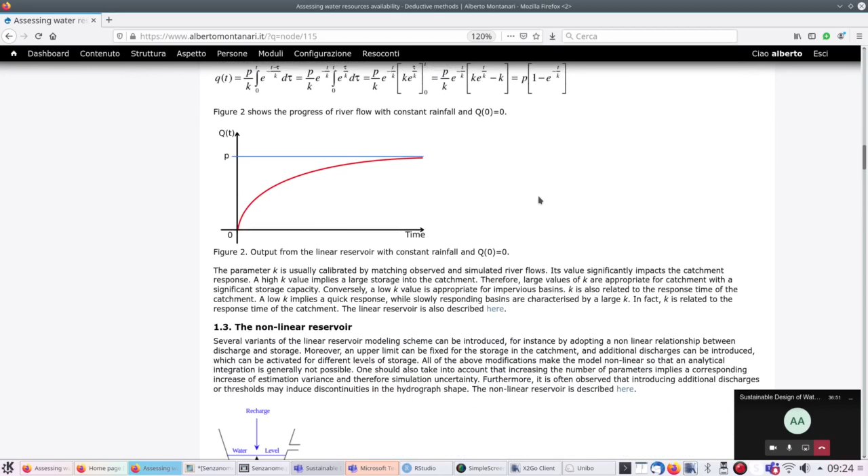Okay, so let's go to Hymod. First of all, let me point out some changes that I did to the web page. I think you already had a look at it.

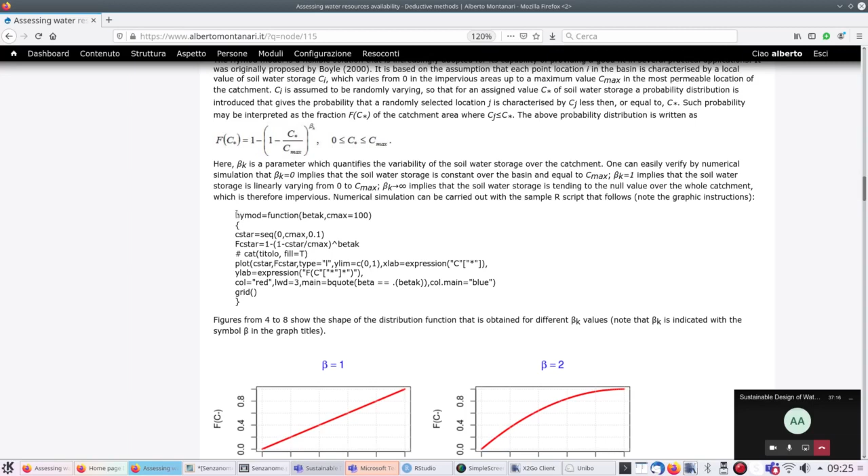Perhaps the most important is the fact that I included these graphs, and I'll comment on them later, but I just want to point out the R code, which I embedded here and I'm highlighting with the mouse.

I think it is interesting for the graphic parameters. The code is very simple, just a code to draw a graph, but what I did here in these figures is use subscripts. In C star is a subscript. Look at how the subscript was introduced, the instruction is here. I'm not commenting now, just have a look at it.

Also, another interesting thing is the graphic title, because here I put first a Greek letter, which is not that easy. Second, the value of the parameter was not manually introduced. So beta equal 1 in the first graph, 1 was not manually introduced. 1 is a variable in R, which is called beta k in this code. So it is not really easy to find out on the web how to write this instruction which I'm selecting.

Main is the argument of the plot function that allows you to specify the plot title. Usually what people do is write main equal, between commas, some text. Here the instruction is different because I had to use bquote, the R function that allows you to combine values of variables with text. Again, we are not discussing it in detail now.

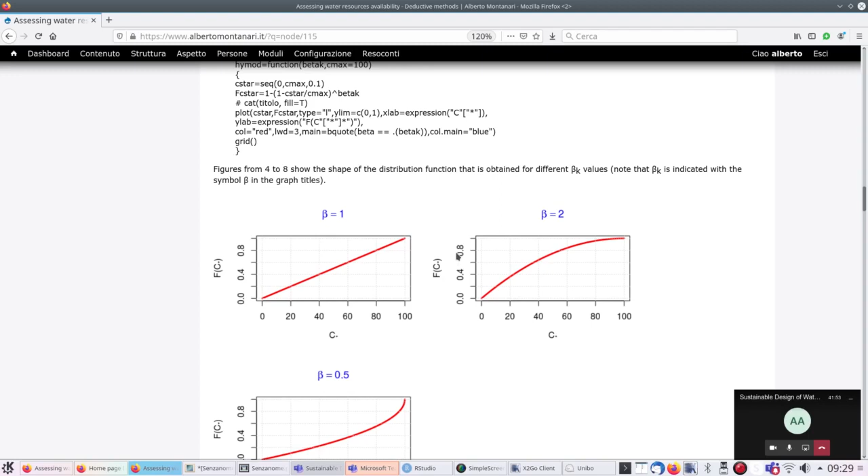Now, I want to make sure, also because I was not completely happy with my lecturing last time in terms of clarity, that you got the concept of this model. And again, I go up and let's see this relationship.

The model has a basic relationship, that's a probability distribution. We learned what probability is, and it gives a probability depending on essentially two parameters, Cmax and beta k. Cmax and beta k in this function are two parameters, namely two values that I can specify to give the function a given shape. Of course, the shape of this function will be determined based on the catchment of my application. Just keep in mind two parameters, it's a probability distribution with two parameters.

And it gives the probability that for a given point in the catchment, we have a soil water storage C star, which is lower or equal than a given value. It gives you the probability that we have a soil water storage in the catchment at a given location that is lower or equal than a given value C star.

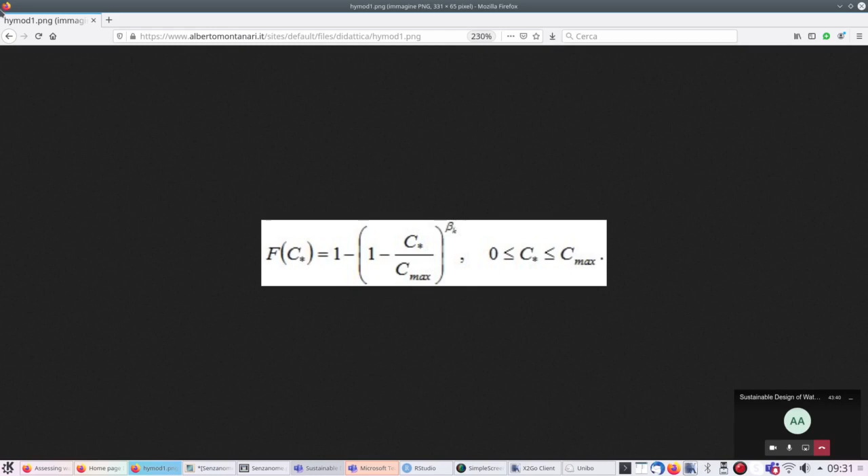So again, I fix a value C star of soil water storage, and the function gives the probability that in any location I have less or equal such water storage. Okay, and let's now just focus a little bit more on what is the meaning of beta tending to 0. First of all, beta equal 1 means that you have a linear relationship between C star and the probability F C star.

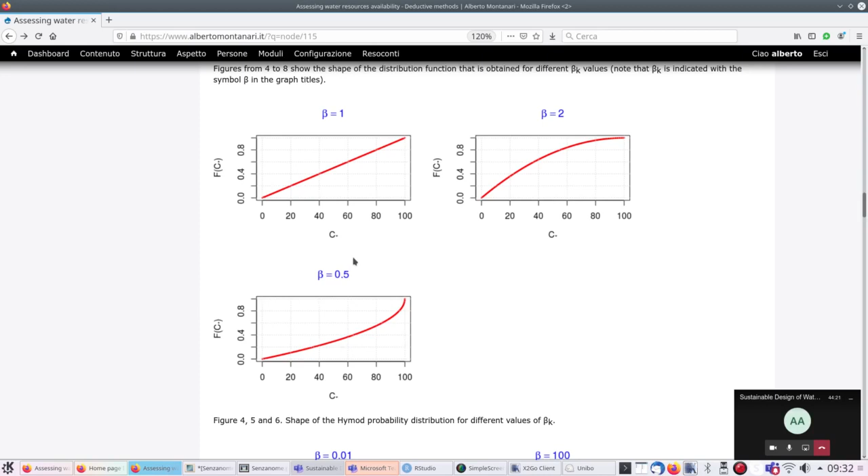Perfect. Beta greater than 1 means that the function is concave, so the convexity is towards the bottom of the figure. Beta less than 1, the function is convex, meaning that the convexity is upward towards the upper part of the figure. Now, I want to stress this, what happens if beta is tending to 0? So it means that, for instance, if you take a C star, which is 99 in this case, you have a probability of 0 that in the catchment you have less storage than that, which means that everywhere in the catchment you have a very high storage, which is Cmax.

Okay. Conversely, if beta increases, beta equal 100, means that even for a very small storage, you have a very high probability that everywhere in the catchment you have less storage than that. So even if I get a storage of 2, I have a high probability that everywhere in the catchment, the water storage capacity is lower than 2, which means that the catchment is impervious.

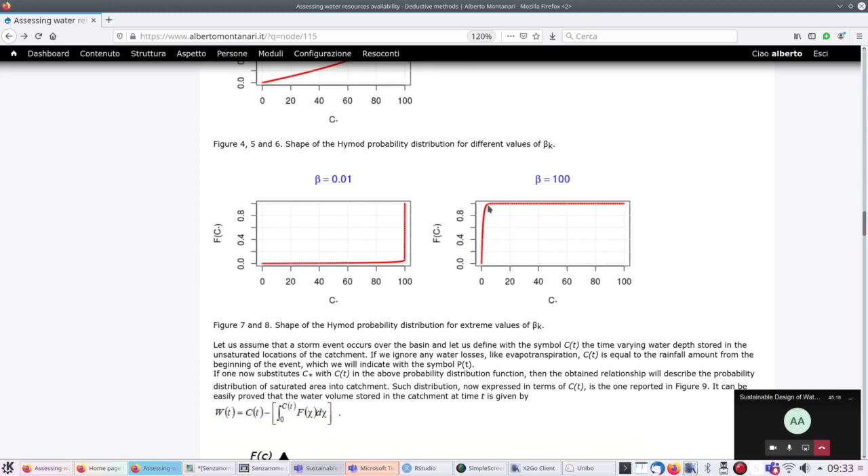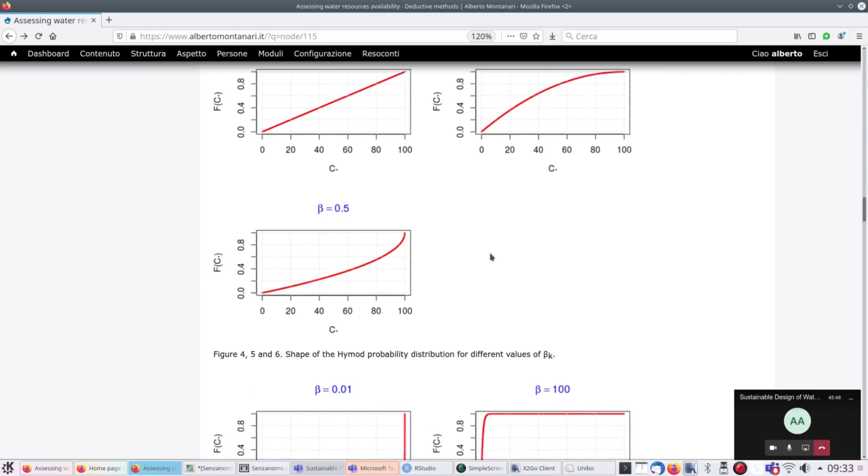Okay? So it's clear that if I look at a generic shape of this function, the shape will change depending on the catchment. If the catchment is very permeable everywhere, I expect a convexity which is directed upward, beta less than 1. If the catchment is more or less impervious, I expect a convexity that is directed downward, beta greater than 1. Perfect.

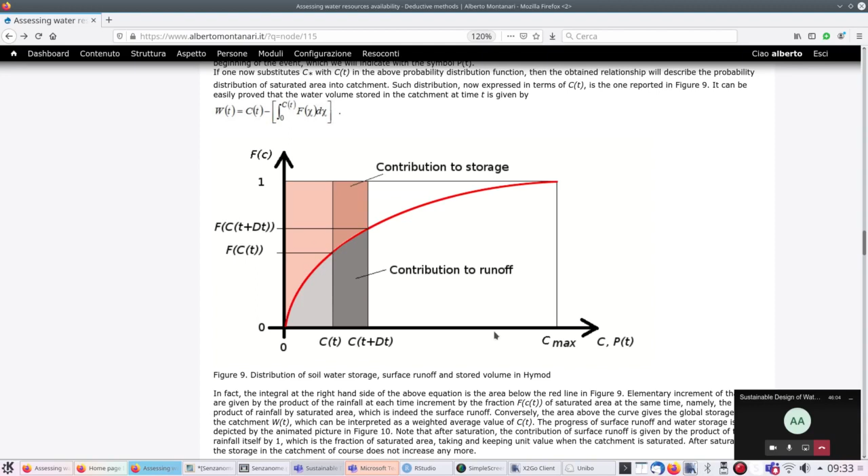And the other thing, which I hope you understood, is this figure. As time passes during a rainfall event, you get at each time step a rainfall P. So let's suppose you have an event of 10 hours. Each hour you have PT, which is rainfall at each hour. The cumulative rainfall, under the assumption that we don't have any losses, is equal to CT. And remember that CT is the water storage in the parts of the catchment that are not saturated, which is equal to rainfall, because if it rains over a very permeable catchment, all the rainfall infiltrates, so all the rainfall is equal to storage.

And then this dark gray shaded area under the curve is the individual contribution to runoff, because the difference CT plus DT minus CT is rainfall at each time step. And if you multiply rainfall times the difference F(CT plus DT) minus F(CT), or let me say, if you multiply rainfall times F(C), whatever it is, you get rainfall multiplied by the fraction of areas that have a storage that is less than the considered storage at time t, which means runoff, because what rains over the areas that have less storage than rainfall is completely transformed into runoff, because it is rain that falls over an already saturated catchment. Because if the storage is less than rainfall, it means that the catchment is saturated.

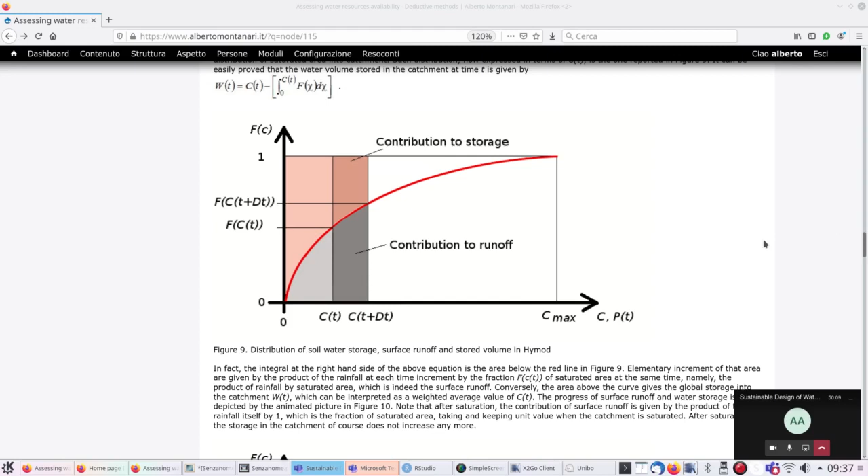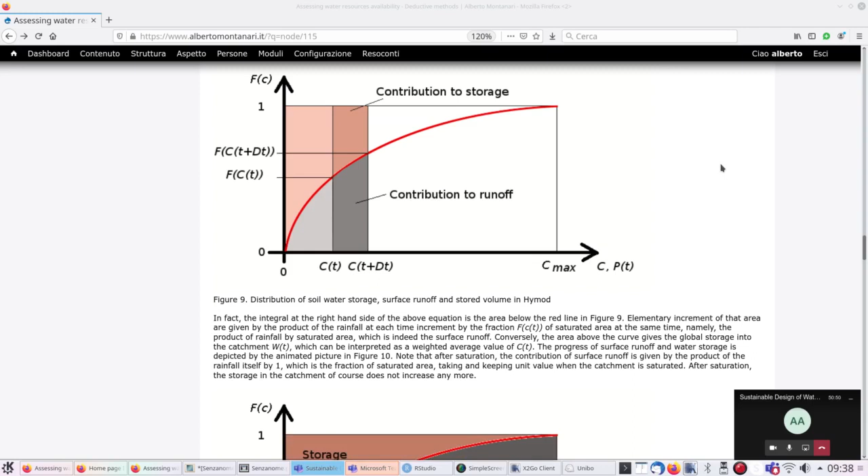Before we move forward, let's note that we are assuming, you can't see it here but on my website I updated because this specification was missing, it was implicit. We are assuming that C0 is equal to 0, which means that at the beginning of the event we have 0 rainfall, 0 cumulative rainfall. This is fine, but we also have 0 storage in the catchment, because we are making the assumption that the cumulative rainfall is equal to storage in the catchment in the unsaturated areas, and therefore let's assume that it's 0.

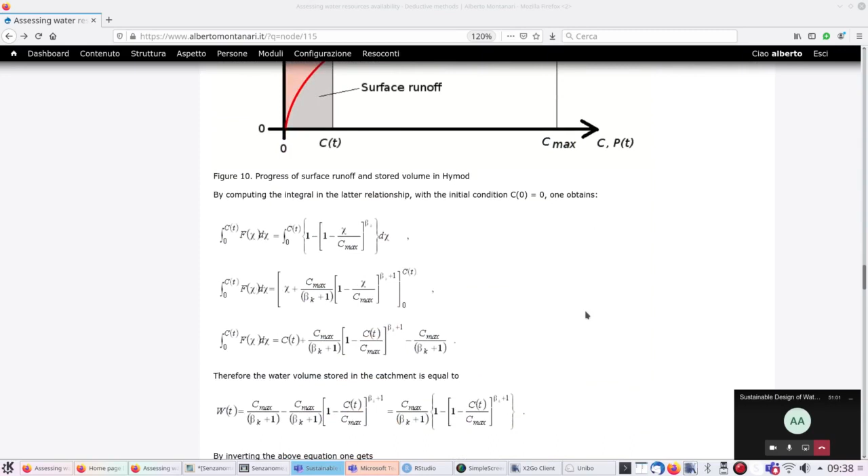Very good. Now we have to compute this integral, and I would like to make an experiment now, because here you can see the computation of the integral. On the other hand, there are some missing steps here. I would like to make an experiment and try to write on a sheet. I'm missing the blackboard because at this stage I would have written on the blackboard in a classroom.

And by the way, I bought, but I'm still waiting for it to be sent to my home, a graphic tablet which will allow me to emulate the blackboard, but still I don't have it. So let me try to use the phone to share my blank sheet with you. I'm not sure I can succeed.

Let's see. I think I now have to look at the screen of the PC. I'm not sure I can. Let me see, still not appearing, just 1 second. Okay, now it should work. Just 1 second, let's see if the connection is good enough, because I still can't see it on my screen. Doesn't appear, just 1 second, I try again. Should be okay, let's see if it works. Still, okay, maybe I have to, 1 second. Okay. Let me try again, it worked yesterday, but you know, always tricky. Still can't see here, so let me see. Okay, I think I got it, 1 second. So let's see. No, still not working. Don't understand why. Okay, so I think I'll need to. You can't see a blank sheet, isn't it? I think you just see a kind of pink circle in between. Let me see if I can. Okay, let's forget about it.

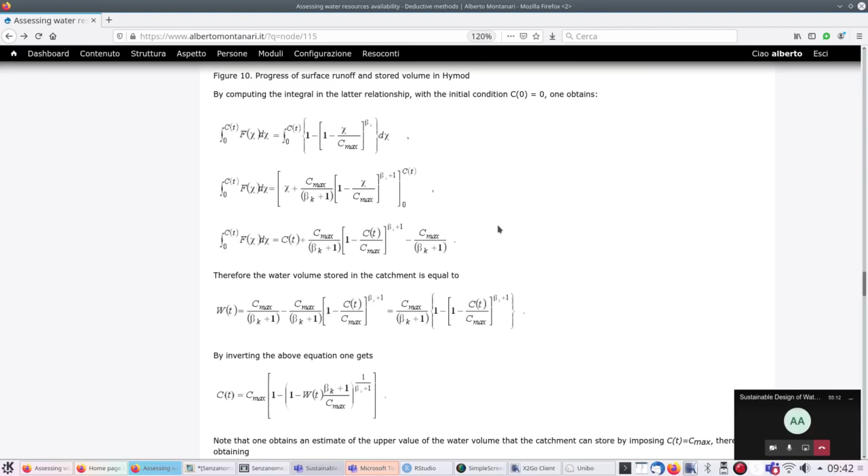Okay, so what you see in the first row is just the previous relationship with an integral sign on the left and right-hand side, and the integral is computed between 0 and a given value of Ct. Again, remember that Ct is our rainfall from the beginning of the event.

Good. Now, be also careful, I am including a variable of integration, which I indicate with the symbol chi. The variable of integration is just to distinguish inside the integral the varying variable, varying between 0 and Ct, which is the independent variable of my function f.

Okay. Now, in the right-hand side, as I said, you just see under the sign of integral the difference 1 minus square parenthesis 1 minus chi divided by Cmax to the power of beta k. Chi substitutes the previous Ct variable, which is now the variable of integration.

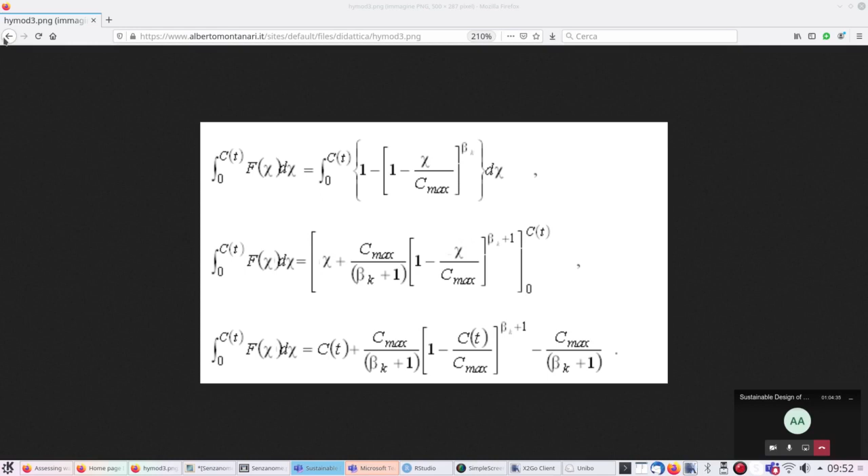Okay, good. Now let me go back to the website. So, if we accept that this quantity, meaning the quantity you now see in the upper part of the screen, is the cumulative runoff from the beginning of the event, then if we want to compute the water volume stored in the catchment, this is simply equal to Ct minus the cumulative runoff, because Ct is total rainfall. If you subtract from total rainfall the cumulative runoff, you get the storage.

So if you get the quantity which is in the upper part of my screen, and compute the difference Ct minus that quantity, you precisely get the storage. And in fact, if you look at the quantity in the upper part of my screen, it is Ct plus something. If you compute Ct minus Ct, they annihilate each other, and therefore you just remain with the plus something, which is precisely what you find below, with the sign changed because I computed a difference. I computed Ct minus the quantity in the upper part of the screen, and therefore below I find Cmax divided by beta k plus 1.

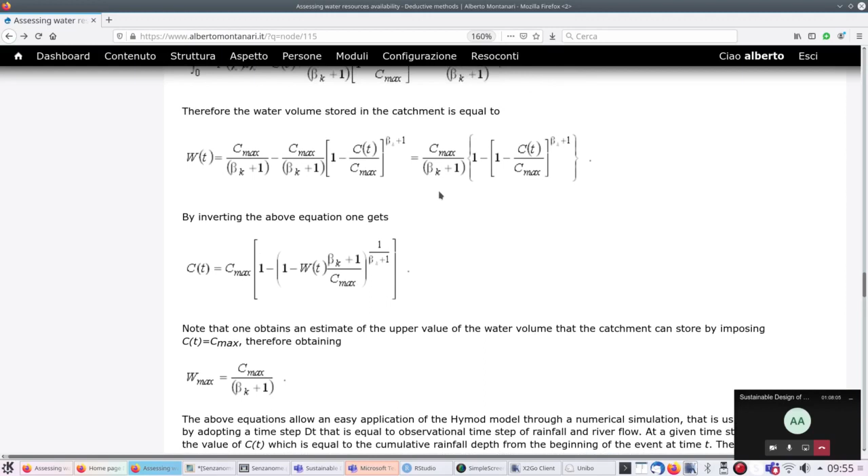So let's invert the quantity that you see in the upper part of the screen, in order to get an explicit representation for Ct, which you find in the second row. This will be useful later. Passing from the first row to the second row is just a simple mathematical transformation. You have to extract Ct from the first row. In order to do that, you need to raise the whole relationship to a power, and the power is 1 divided by beta k plus 1. Then with a simple mathematical transformation, you get the explicit value for Ct.

Good. Now, it is interesting to note what you see here and this equation. What is this equation? It's the max storage. And when do you obtain the max storage? When Ct is equal to Cmax.

Ct is cumulative rainfall. When you get cumulative rainfall which equates the max storage into the catchment, where when I say max storage, I mean the maximum value of storage at each individual location. So I get the storage at each individual location and I get the max. So when rainfall equates the max storage over the catchment, meaning max individual storage at each location, the catchment is saturated, which means that even the single location that has the highest capability to store water is saturated, because rainfall equates the highest capability in the catchment to store water. So the catchment is saturated.

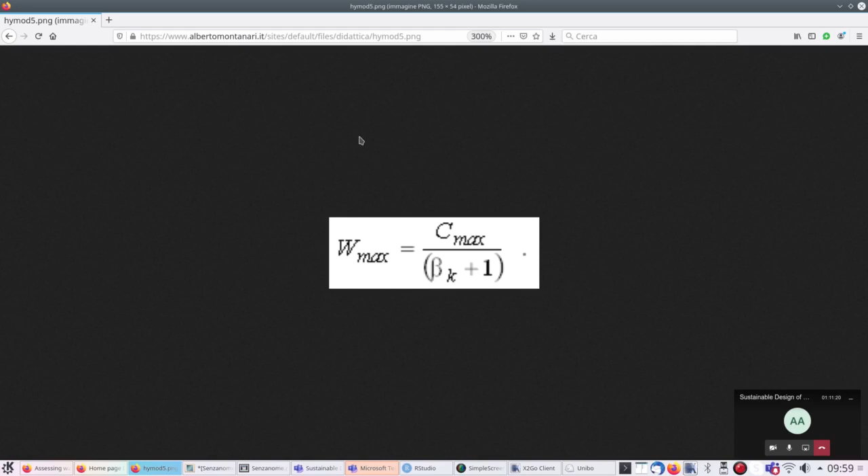The same thing occurs over a saturated catchment. It's interesting then to compute what is the overall cumulative storage over the catchment when it gets to saturation. This is easy to compute, it's given by this relationship. How is this relationship derived? Simply by going back to the relationship you see in the upper part of the screen, on the right, and putting Cmax instead of Ct. And therefore, between square parentheses, you get 1 minus 1, which is 0. So between curly brackets you get just 1, and therefore your Wmax is just equal to the multiplier Cmax divided by beta k plus 1.

Any question? Because these are all the equations that we need to apply the model. Believe me, it is complicated to explain in words, but it's not complicated to understand. It's just an integral. And you will see it even less complicated to apply in R. It's very simple.

No questions? So, but I give you 30 seconds more while I put on the screen what I need. Just one second because I had to decline a phone call. Okay, very good. Give me one minute because I can't see the chat anymore. I have to understand what happened. Okay, I see it, very good. And let me move this here.

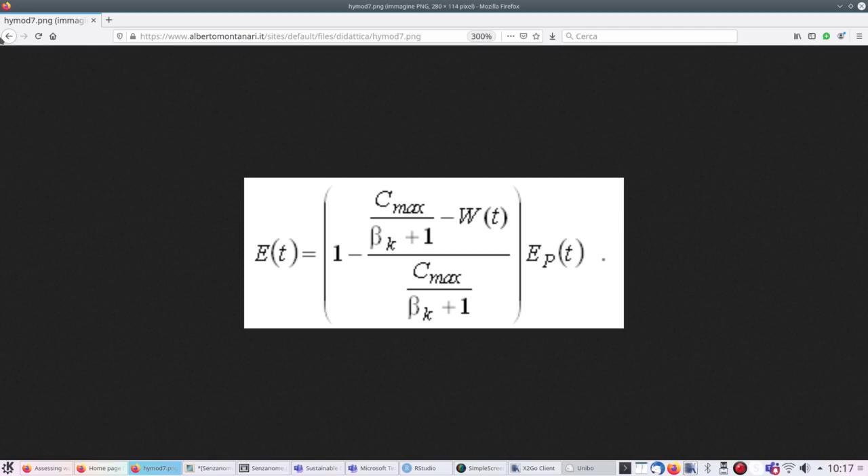Now we only have the problem that we have to subtract it from something. This is a water loss. Evapotranspiration is a water loss, so we need to subtract it from something. What is the something? It's the catchment storage, the ideal state variable from which we have to subtract evapotranspiration.

And in fact, you see here, let me see where it's written, okay, we need the relationship, let's give it time to get selected. The water storage at time t plus 1 is given by W(t+1) equals Wt minus

Et. It is simply subtracted. And note that we subtract the evapotranspiration from water storage at the end of the time step. It's just a matter of choice.

So we first compute ER1 and ER2, and then before passing to the next step, we subtract evapotranspiration from the resulting storage. As I said, it's just a matter of choice. You may subtract evapotranspiration at the beginning of the time step, it's just your choice, and it's part of the numerical integration approximation, as we discussed last time.

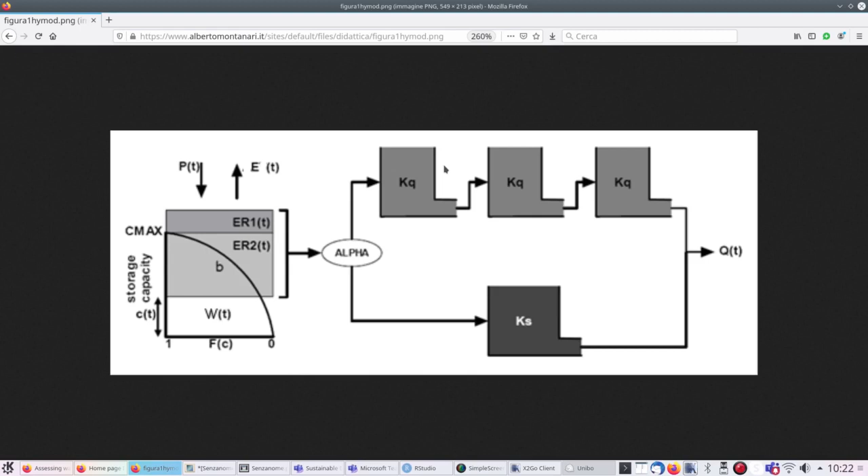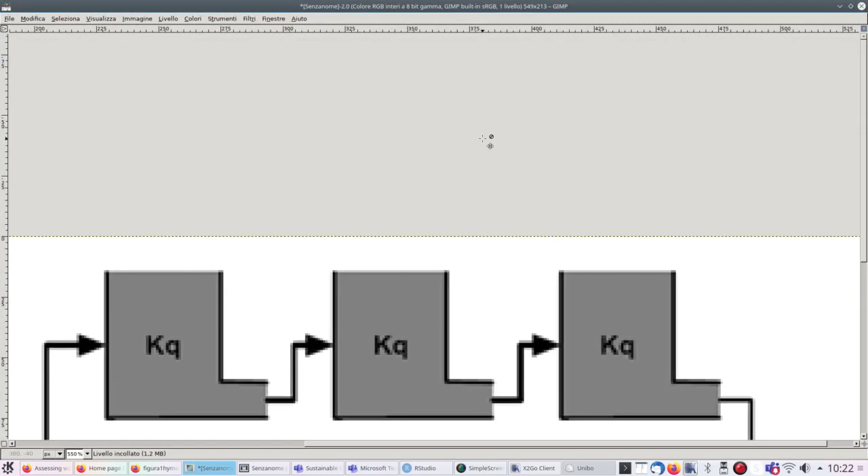But I just want to tell you that the thick black lines you see at the bottom of the left figure, this kind of quarter of circle, let me do this, so we breathe a little bit. Let me open it in GIMP. Okay, just a second. Good, here we are. Too big. Let's see, I think this is the correct size. Okay, just one second. Let's do like this, I need the panels. Just one second, okay, this is what I need, but I need to change the color, I don't like black. Okay, now it works, but second dimension, let's put, okay, good.

As I said, this quarter of circle here, and now I'm trying to follow this curve. Okay, this is just the probability distribution that you were used to see with another orientation. If you look at the vertical axis, it's now representing CT, and it was the horizontal axis before. If you look at the horizontal axis, it's representing FC, but with an inverse representation between 0 and 1. And it is the same representation.

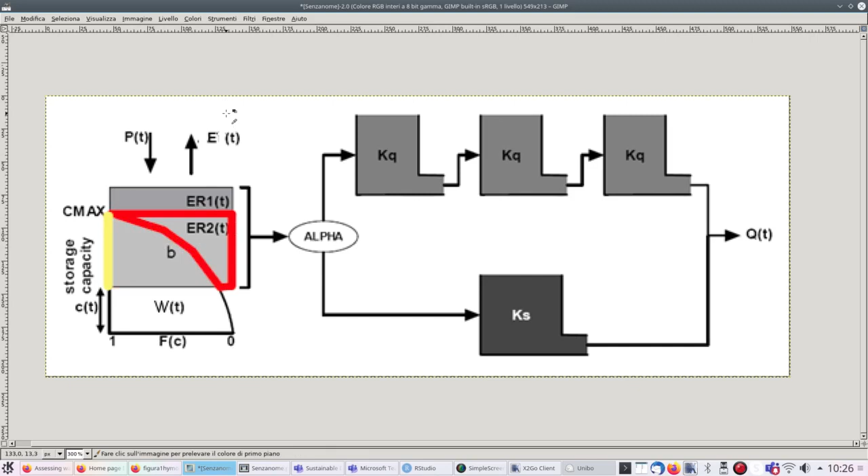So I think it is indeed a smart way of presenting it. When HYMOD was presented in 2000, this kind of representation was used.

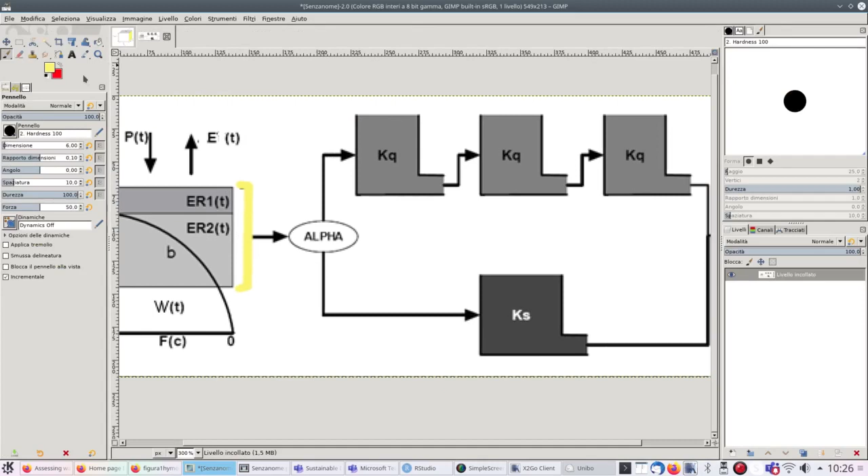Now let's look at the sum of ER1 plus ER2, which is the total contribution to surface runoff. Let me get the red color now. This goes towards the river, so here we get the surface runoff going towards the river.

And it is, by assumption, split into two parts through a parameter alpha. So a third parameter is introduced. Remember, so far we introduced in our equations two parameters, beta k and Cmax. Now we introduce a third parameter, alpha, which is just a weight. It splits the surface runoff into two parts, one minus alpha and alpha.

If alpha is 0.5, you get the surface runoff split into two equal parts. If alpha is 0, it's split only into the upper part. If alpha is 1, only into the lower part. So it's just a linear split.

In this way, we subdivide the surface runoff into two components. Why? Because we want to recognize that in a catchment, there are usually two different velocities at which runoff reaches the river: a high velocity component, which is pure surface runoff, and a lower velocity component, which is still considered superficial but takes place a bit more into the soil. It's also called hypodermic runoff, meaning it's below the skin of the catchment.

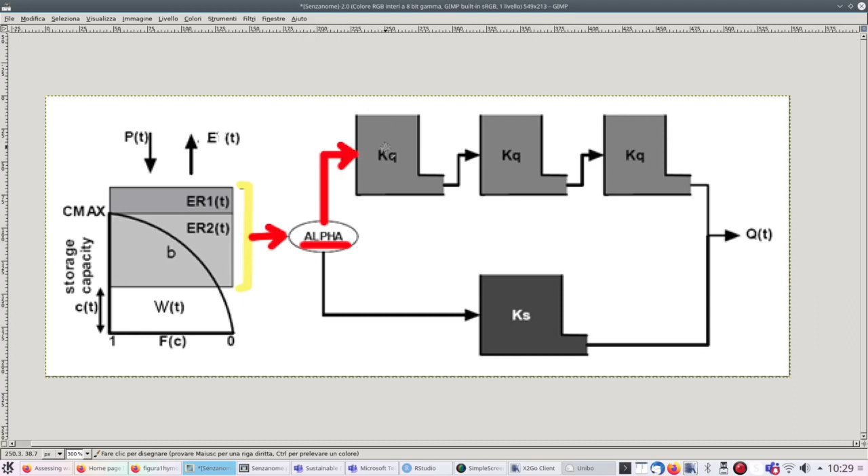Now let's look at the upper part, this one. This one goes to a cascade of three linear reservoirs. The runoff goes into this first reservoir here, with a linear parameter K called KQ, which stands for K quick runoff. KQ is the parameter of the linear reservoir.

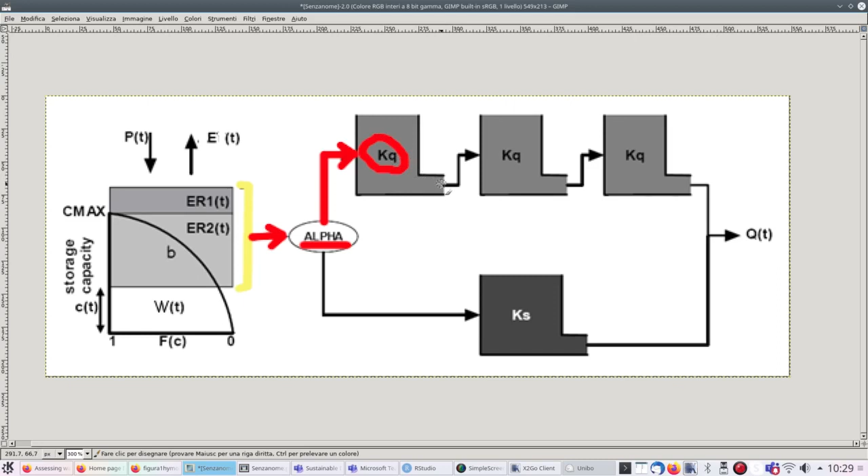Through KQ, depending on the storage, you get the outflow from the first reservoir, which is then used as input to the second reservoir, again a linear one with the same constant KQ. Then you compute the output from the second reservoir, which is transformed into the input to the third one, and finally from the third reservoir you get the first contribution, which is the quick contribution.

Good, now let's focus on, let's take the yellow, let's focus on the other component. The slow component goes directly inside a single linear reservoir, just one reservoir. From this reservoir it goes again to the river, and not only to the river but to the closure of the river, because we need to get the river flow at the closure of the catchment. So that's it.

And of course you may wonder why three reservoirs above. It's just a subjective decision—you can put only one if you like, or five. It has been proved that by splitting the runoff into these two components, one using just one linear reservoir, the other using three linear reservoirs, this is flexible enough to represent several different catchments. On the other hand, we introduced two additional parameters, Ks and Kq.

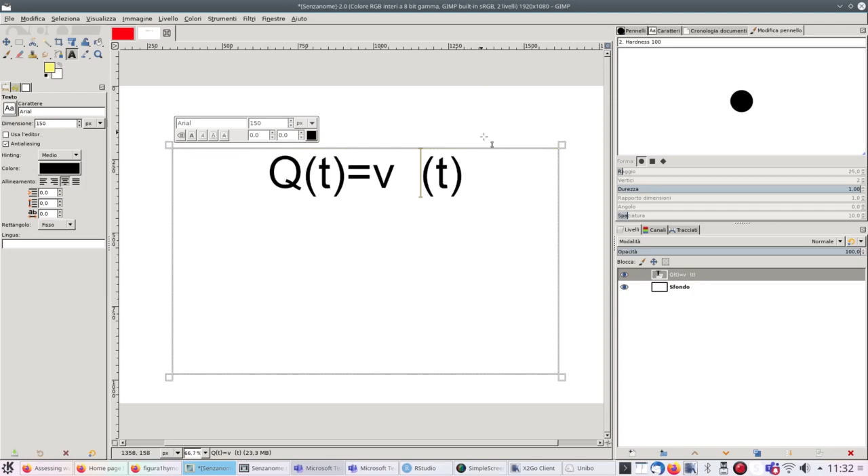If we indicate the groundwater flow with the symbol QT, this can be expressed as the product of the velocity, the module of the velocity vector, let's say this is an average velocity, Vm, times the area of the cross section of the groundwater flow. Let me write m as a subscript.

This is the relationship which applies. Once we cut the groundwater flow with a plane, we obtain a cross section which has an area AT, and this area is in principle and in general time changing, because the thickness of the current, the thickness of the flow, can change. So let's assume that area depends on time. If I multiply the area of the cross section times the average velocity of the flow in this cross section, then we get the amount of the flow.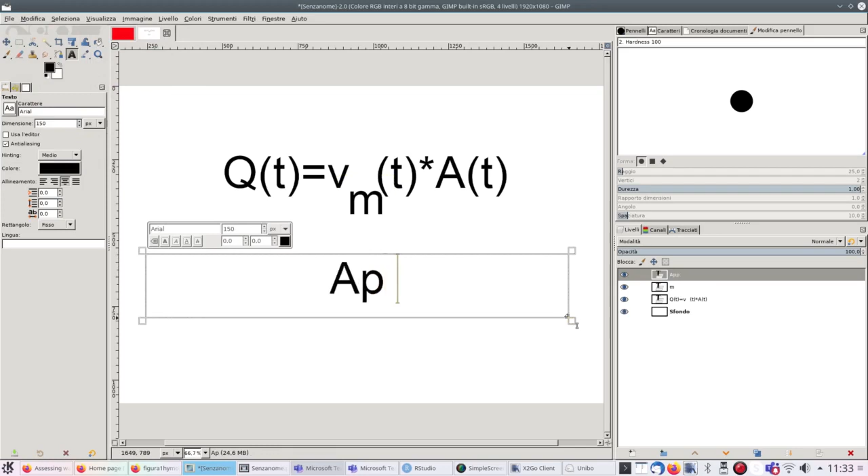This relationship applies to currents. And in order to be able to say that the groundwater flow is a current, I needed to introduce the assumption that the velocity vector is running along the same direction for all fluid particles.

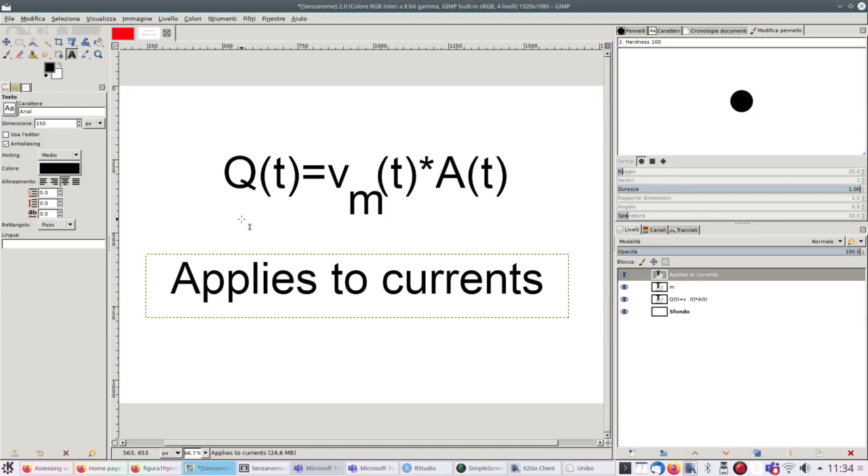Let's keep this relationship into account because it is important, because our groundwater flow equation, which we are going to derive, gives us the velocity of the flow. Once we know the velocity, it's equivalent to knowing the flow. We just need to know the area of the cross flow section, and then knowledge of the velocity is equivalent to knowledge of the flow. So this is another assumption that we introduced: planar motion.

The list of assumptions is already described in the other version of the website. We assume that the fluid is incompressible, and we assume that for a given control volume—what is a control volume? It is a volume of ground where we apply conservation of mass and conservation of energy. So each conservation equation is applied to a volume.

In a river, it is easy to identify the control volume: you take a river, and the wet area of the river is the control volume. In a groundwater aquifer, you have to specify the geometry, which may be the whole aquifer, the whole groundwater body, or a section of it.

We assume that within this control volume there are no sources, no source terms, which in a more hydraulic way can be stated by saying that there are no sources of water mass in the control volume.

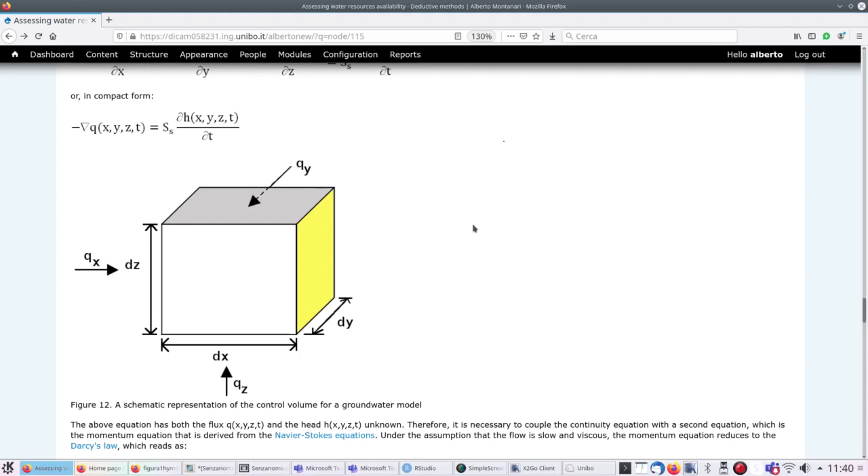Here you can see on the screen now the combination of the web page—now the figure disappeared—with the figure that you can find here below. I think it is useful if I put the figure close to the math development here.

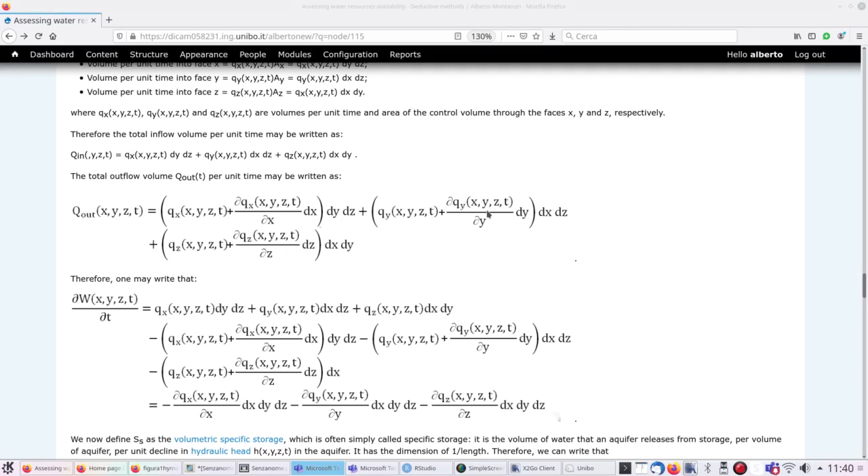The way is, sorry, is this one. I will need to move the figure just up and down in order to not cover the text, so let me put it down now. This figure shows our control volume.

Our control volume is a portion of ground with a cubic shape because it's easier to define. In principle, the control volume can have any shape, provided that you describe it in infinitesimal terms, because it needs to have infinitesimal size. This is because we need to assume that inside the control volume we have constant properties of soils and constant properties of flow.

Otherwise, if we don't take this assumption, we need to assume that average conditions apply. We don't want to apply average conditions, we want to be detailed. Therefore, in order to be detailed, let's assume that our control volume has infinitesimal size. You see that the dimensions are indicated as dx, dy, dz, and the d stands for just very small, infinitesimal.

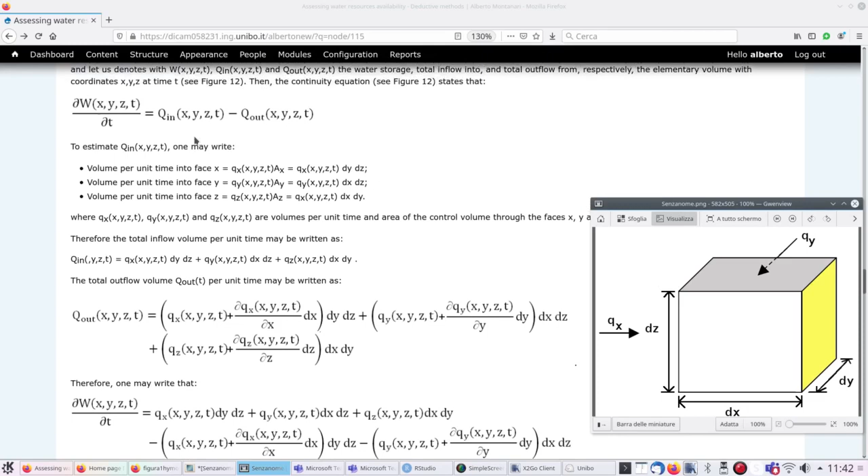So this is our control volume. Let us denote with W, which depends on x, y, z, and time. Keep in mind that our independent variables include time, so we have 3 spatial independent variables, x, y, z, and also a 4th independent variable, which is time. We denote with W the water storage in the control volume.

We denote with the symbol Q in and Q out the inflow, total inflow and total outflow from this elementary volume. Inflow and outflow also depend on time and the 3 spatial coordinates.

Now let's write the continuity equation. The continuity equation is the mass balance equation. It is very simple to write down because we can simply say that change in storage is equal to inflow minus outflow. So for our elementary volume, change in storage W is equal to inflow minus outflow, and this is the change in storage with respect to time.

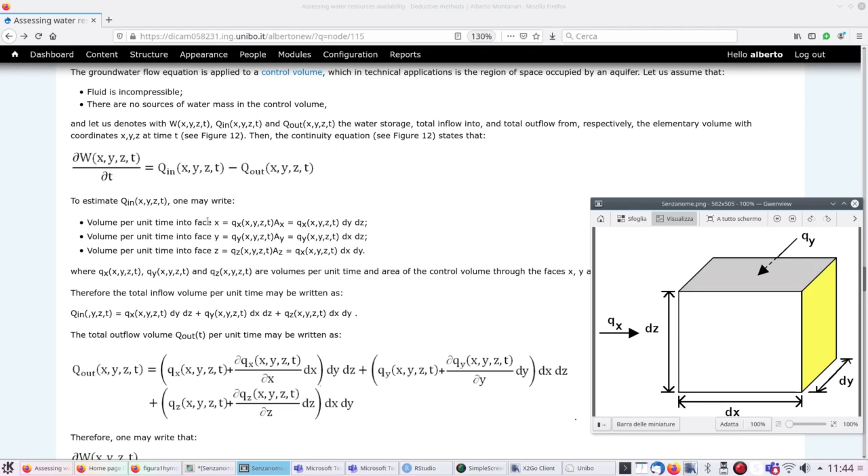Now we need to provide a representation for these variables Q in and Q out. Let's subdivide Q in as well as Q out into three components along the three axes of inflow and outflow. So the volume per unit time into face X is equal to the flow along X, QX, times the area X, the area of the control volume projected perpendicularly to the x-axis.

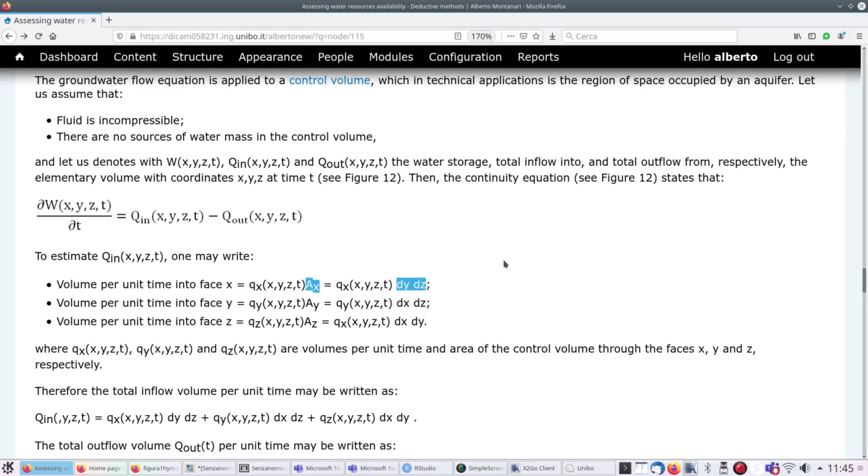So AX can be written as the product of dy dz. Then we obtain that the volume per unit time into face X is QX, as a function of x, y, z, time, times dy dz. A similar expression applies for face Y: the volume is QY, x, y, z, time, times dx dz. A similar expression applies for the volume per unit time into face Z.

Therefore, the total inflow per unit time may be written in this form, the sum of the three flow components, which we can substitute in the equation above.

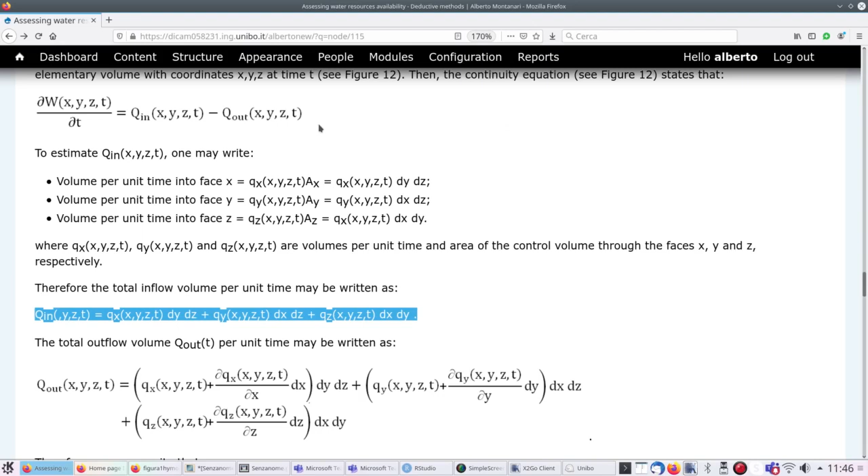Now we have to write Q out. Q out can be written according to this equation, and it is equal again to the sum along the three components. Let's focus on the component along X, which is given by QX, the inflow, plus the change of Q along the same direction X. So you have the inflow plus the derivative of inflow with respect to X multiplied by dX. This gives the flow to get Q out; we need to multiply it times the area of each face.

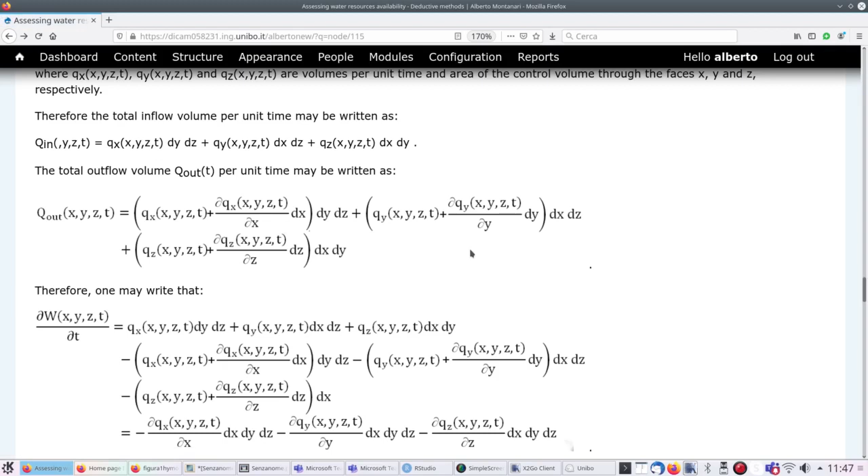No questions so far. Very good, and therefore I can substitute. I substitute in this equation here, Q in and Q out. Now what I obtain is what is reported in the next image here.

It looks complicated, but actually it's only long because it's only a substitution. There is a derivative of W with respect to time on the left-hand side, and the right-hand side is inflow minus outflow. You see that it's inflow, the first row, QX, QY, QZ, minus outflow. The outflow has again three addendums, which I need to subtract. Therefore, if you make the computation, it reduces the right-hand side to the last row. There are terms that annihilate each other, so you get only the last row.

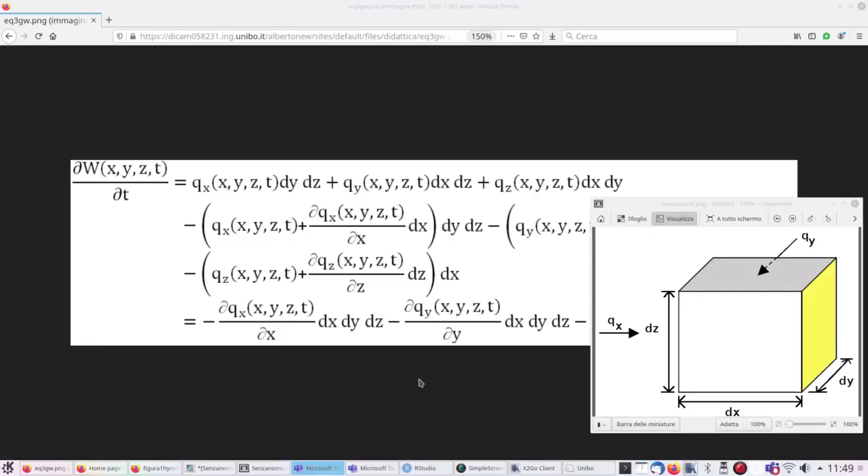One second, let me get it here. This is our equation, and the terms that annihilate each other are these. One second, let me put it in red. So there is this one, I need the brush... this one, don't understand why. Ah yeah, I see.

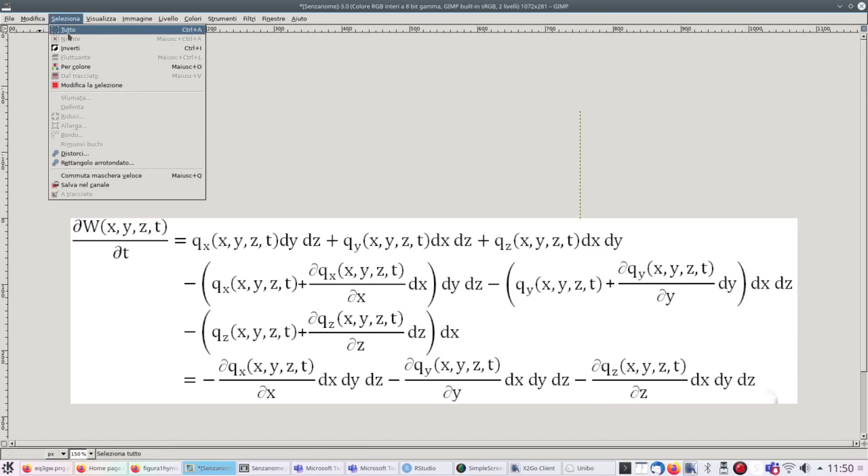Give me 1 second. Ah, okay, good.

So this one compensates with this one, with this one, and the third QZ with this one. So you see that at the end of the story, you get only these terms to survive: this, this, and this. Let's wait for a second that everything appears on the screen, which you find in the last row.

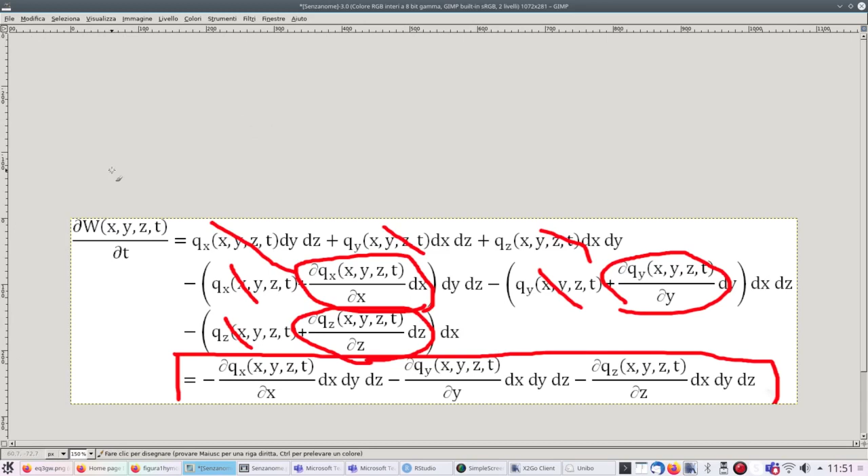1 second, I notice now that there is something missing here, and I'll tell you what is missing. If I change the color, I need to correct this. Let me take a note: groundwater equation. It's useful if I do it on the screen, because I can spot the mistakes. So it's blue now.

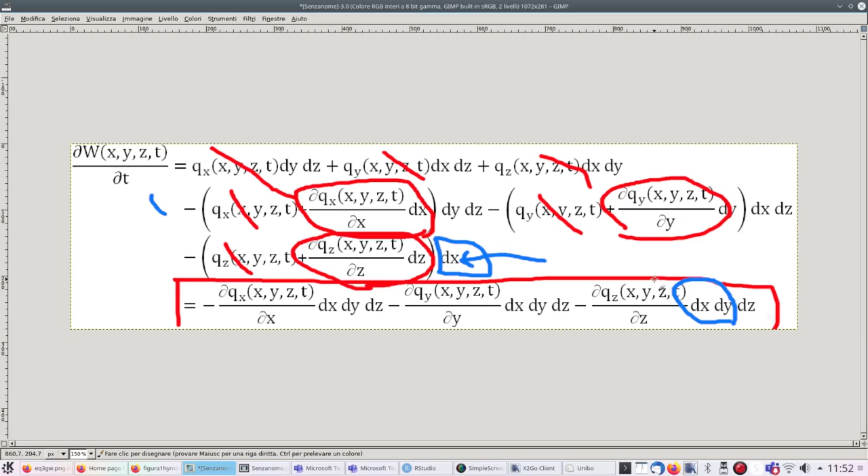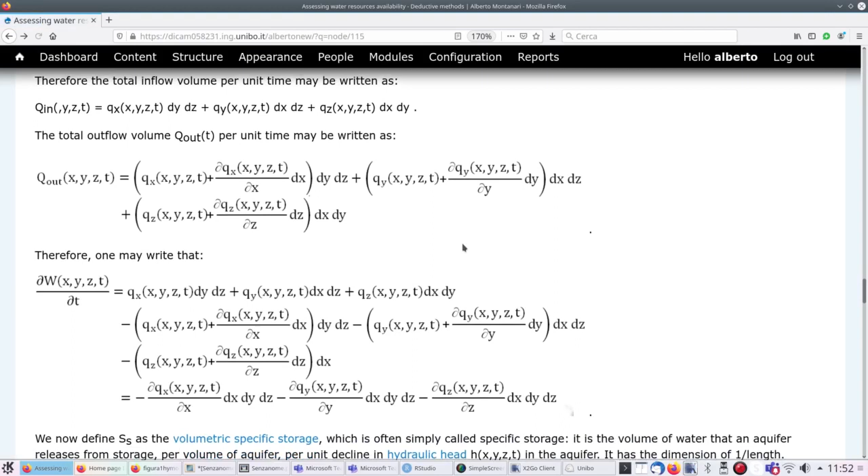Now let me go back to the web page. Okay, so we get to this final equation, which is correct, by the way, it's just missing a dy there. It's an equation which, if you look at it, defines a relationship between storage, W, on the left-hand side, and the derivative of the flow in the 3 directions.

Good. Now let's introduce a quantity which is called volumetric specific storage, and we identify it with the symbol SS. Now it's selected. What is the volumetric specific storage? Simply called specific storage, it is defined as the volume of water that an aquifer releases from storage per volume of aquifer and per unit decline in hydraulic head, which I indicate with the symbol H.

So again, what is the specific storage? I have an aquifer with a given volume and a given hydraulic head. I will explain to you in a moment what hydraulic head is. If I impose a unit decline in hydraulic head, then I get a volume of water from this aquifer. The volume of water that is released by the aquifer per volume of aquifer and per unit decline in hydraulic head is the specific storage.

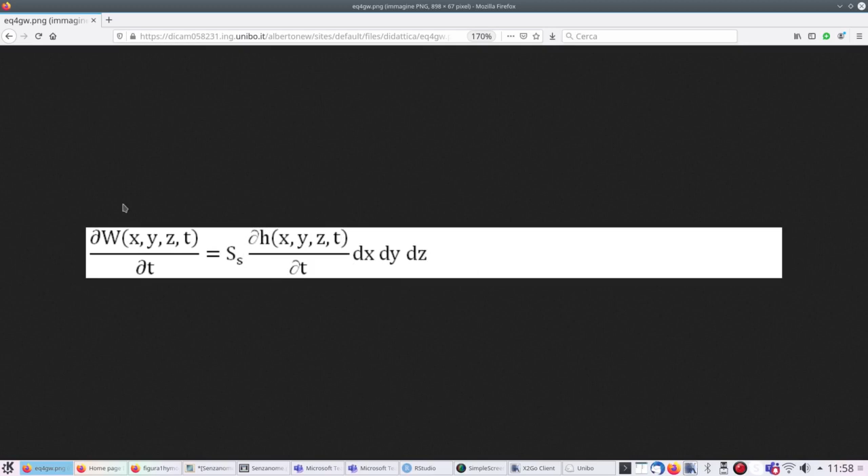Good. Now, specific storage times the change of the head. So on the right-hand side, you have specific storage multiplied by changes of the head in time and the volume of the aquifer, and then you get the change in volume. Very good, I think it is clear.

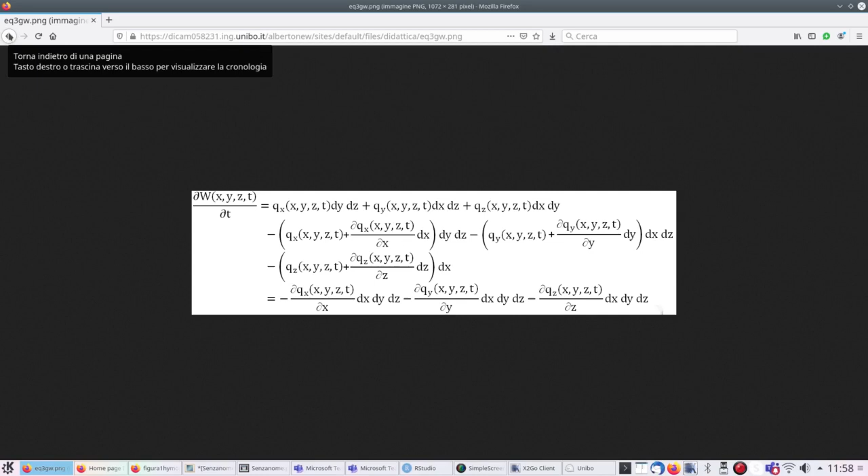And then I can combine the two equations, namely this one here and the one that I just obtained. Okay, now you have it on the screen. I can combine this one with the one I just obtained here.

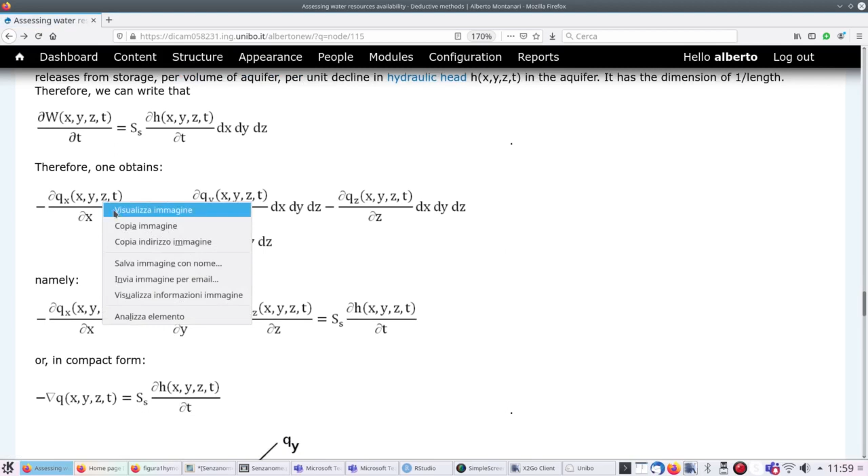You see that W is the same on the left-hand side, so I can combine the two right-hand sides, and then I obtain this one.

And you see that in this equation, each term is multiplied by dx, dy, dz. So I can just divide each term by the elementary volume, which is the product of dx, dy, dz, and then I get this one.

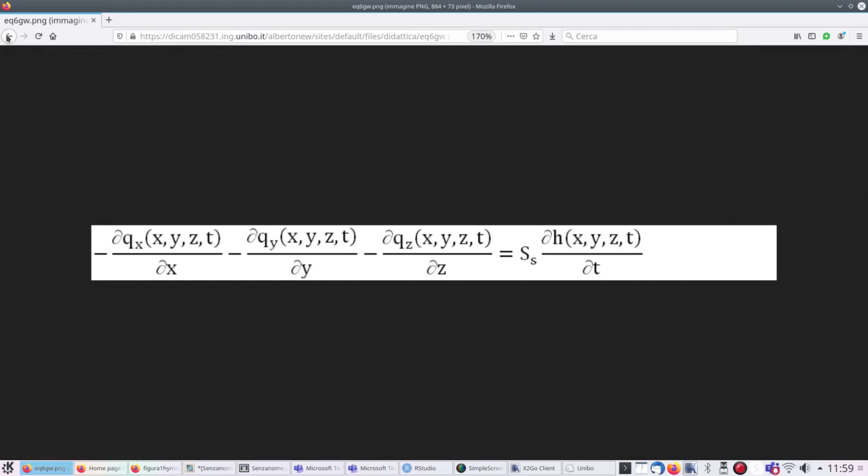Which can be expressed in compact terms through the divergence operator. And then I obtain finally what I wanted to get: this is the groundwater flow equation.

What you just have to remember is the definition of specific storage here. Now I am stopping here, and just keep in mind that this is a partial differential equation, and therefore in order to obtain an explicit representation for the flow, which is what we need, because flow is equivalent to water withdrawal, I need to integrate this equation.